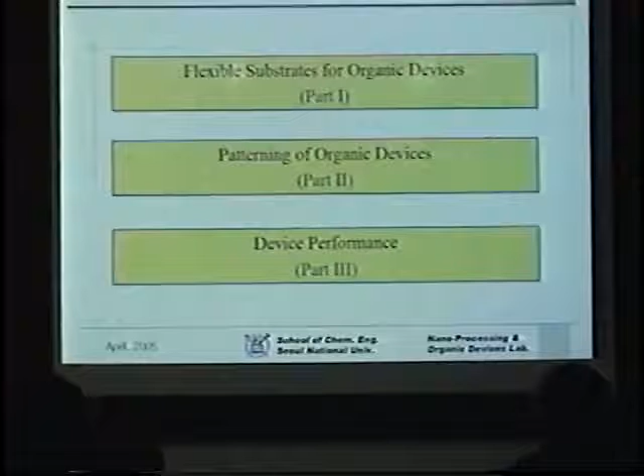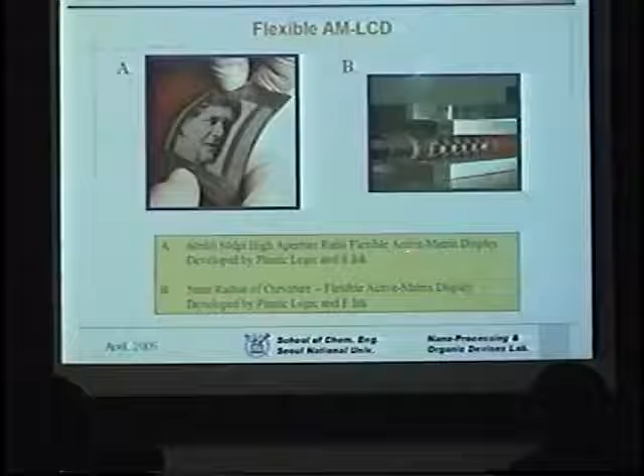When we talk about flexible display, of course we need flexible substrate. Shown here is the active matrix display made by plastic logic and e-ink. And of course, since it's flexible, you can bend it around.

The issues related to flexible substrates are really the requirements that the substrate has to meet, and these are listed here. But the most important thing, foremost, is really the ability of the substrate to resist any permeation or diffusion of water and oxygen.

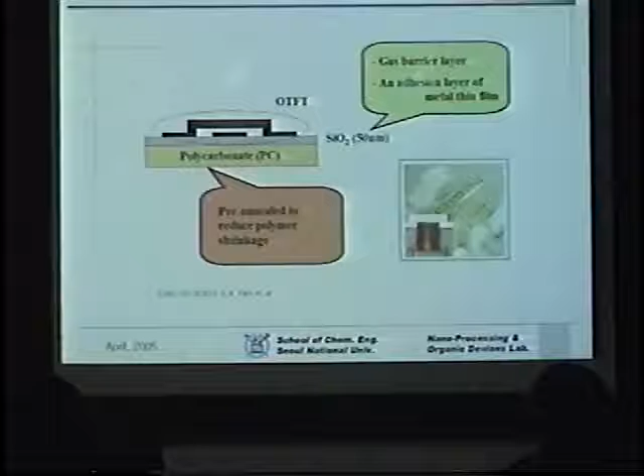The traditional approach for coping with this kind of problem was to use a multi-layer structure. Shown here is one example: we have a silicon dioxide layer on polycarbonate. This SiO2 layer is protecting the device from the air and moisture through this polycarbonate substrate.

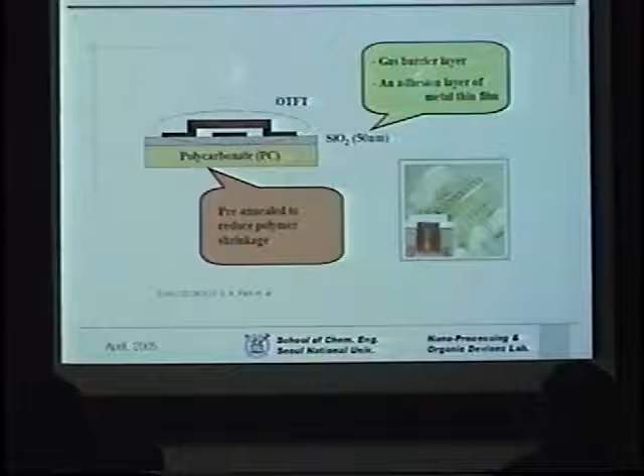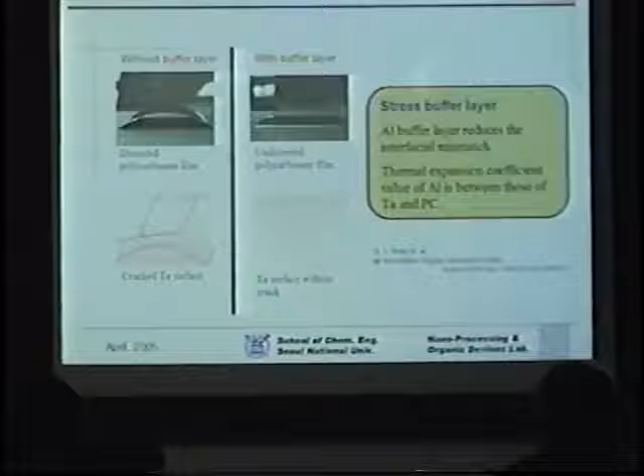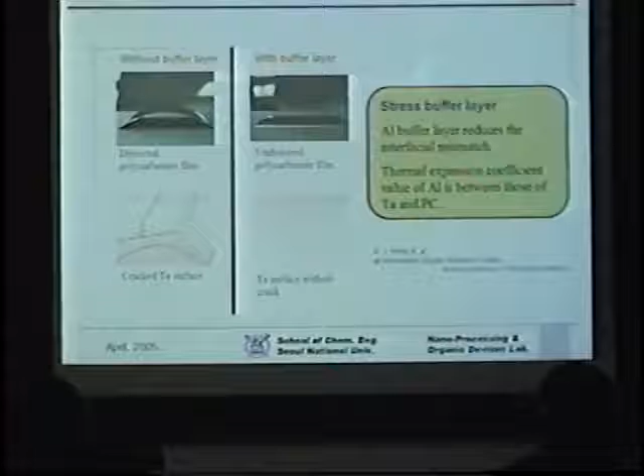Another example is given here. What we have is a metal, Ta, deposited on a substrate. As you can see, because of the difference in thermal expansion coefficients, it bends, and it can crack - the metal surface cracks. But if you introduce an intermediate layer between the Ta metal and the polycarbonate film, you can see that the substrate does not bend, and you don't see any cracks occurring. The reason is that you use an aluminum layer between the Ta and PC, so that you can ease up the effect of the difference in thermal expansion coefficients.

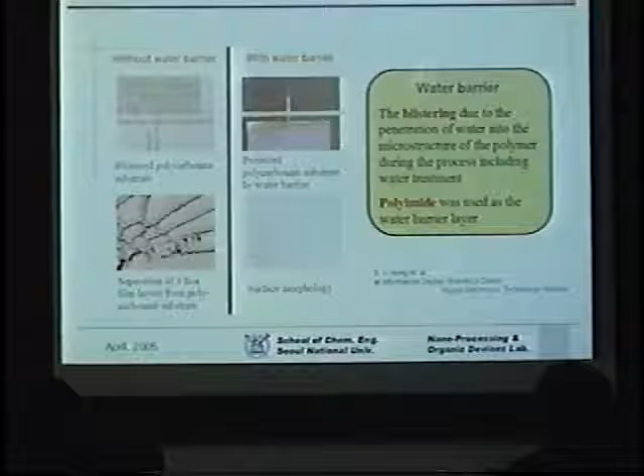Another example is given here. In this particular case, we have polyimide coated onto a polycarbonate substrate. The role of the polyimide layer is to act as a water barrier.

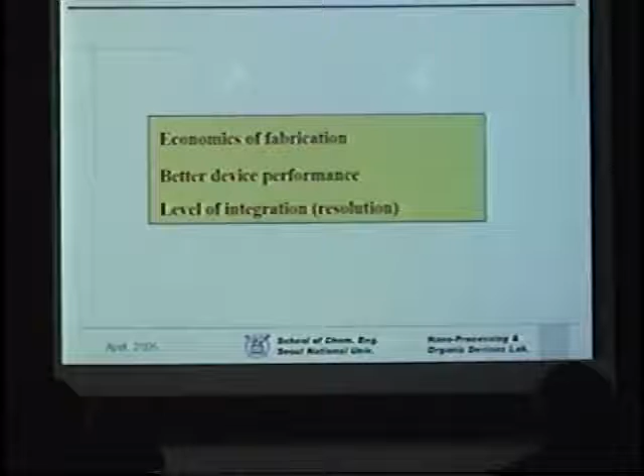This brings us to the next part on patterning for fabrication of organic devices. The issues here are, foremost, the economics of fabrication - whatever the process or patterning technique you use, it has to be economical, and in a blunt way, the one which will cost the least will win out. But in doing so, it has to maintain device performance as well, and there's an issue on resolution - how small a size you can go down to.

In this patterning, the traditional approach is typically to use a shadow mask, separated from the substrate by a certain distance, and through the opening you deposit the material of interest. Because of this gap, you can have shadow effects, making it very difficult to go below, say, 30 microns. Another approach is to use what is called a cathode separator, made through photolithographic means, and then you deposit the material in succession, for instance in OLED, to make the devices.

So there's a question when we talk about patterning: why can't we use the traditional or conventional patterning of photolithography? The reason is fairly simple - the solvents used in photolithography will degrade organic materials.

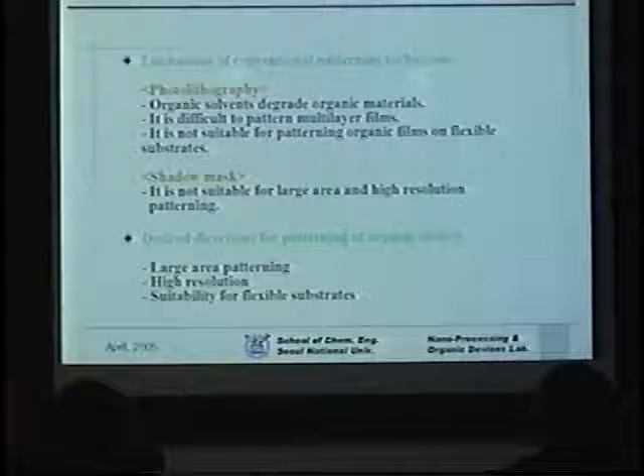And it's not suitable also for patterning organic films on flexible substrates because of the natural undulation inherently present in the substrate. And as indicated, when we shadow mask, it is not suitable for a large area, and it's not suitable for high resolution patterning.

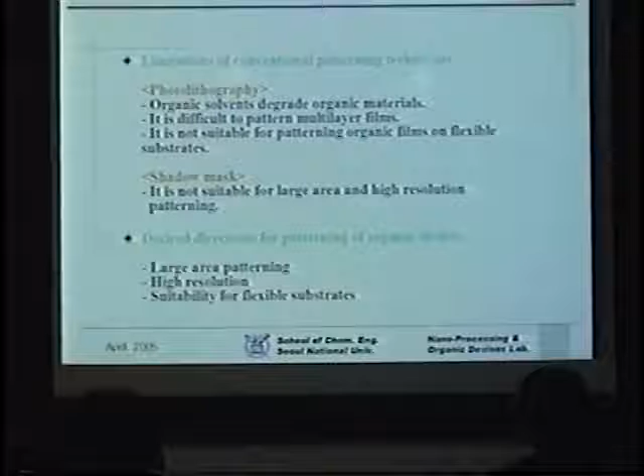Whatever patterning we do, the direction we have to follow is to make sure that we have large area patterning capability, also high resolution. It's got to be suitable for flexible substrates.

When we talk about organic electronics, we often talk about OLED, that is organic light emitting diode, organic thin film transistor, lasers, and sensors. As I indicated, large area applicability, the ability to go down to a small size, and foremost, of course, the cost effectiveness.

Just looking back to what people have done to cope with this problem, we can go to the Forrest Group at Princeton. He came up with what is called the cold welding method. In this particular case, you have a stamp and you deposit the metal layer onto it, and also on the substrate you have a metal layer deposited. You press it, then you heat it up and remove the mold. Upon removing, it takes the part in contact along with it, so you have the patterning done here.

You turn around in about 2 years and see how this can be utilized in some other way. In this particular case, it's a sort of detachment; in this case, it's an attachment process.

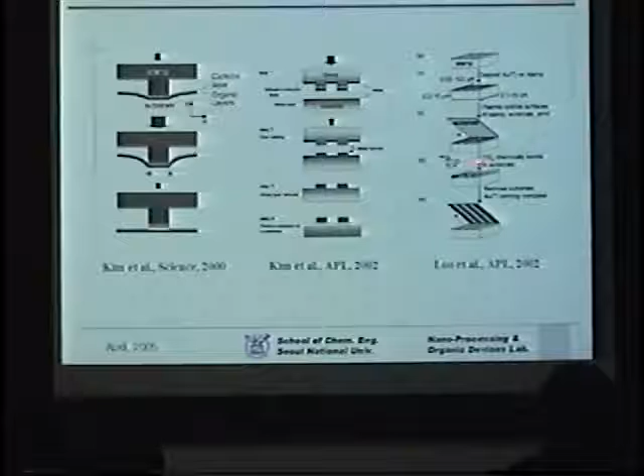And people at Bell Lab, Loo, who is now at I think the University of Texas in Austin, when she was there, the Bell Lab people came up with a similar method. In this particular case, you have a stamp and you deposit films that you want, but on top of any metal you have Ti for, say, adhesion later on. Then you make the substrate get in contact with the stamp. You heat it up some, and then because of chemical bonding taking place between Ti and the substrate, TiO2 to be more precise, you transfer the pattern from the mold to the substrate.

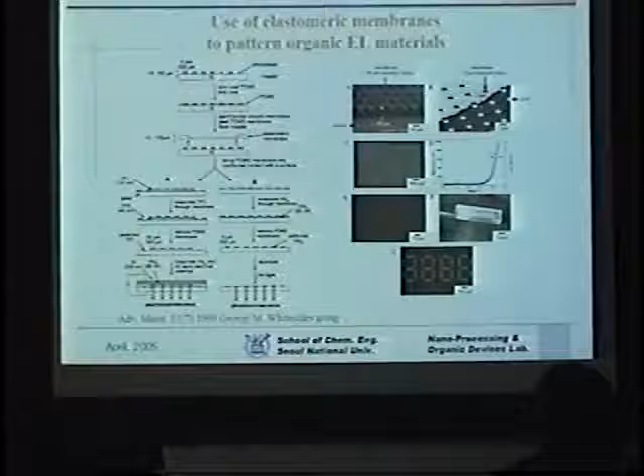Also, there were a number of efforts by Whitesides' group at Harvard. In this particular case, he used a PDMS mold, or polydimethyl siloxane mold, and this perforated membrane essentially acts as a shadow mask, but this time in contact mode, so you do the deposition and get what you want.

They in turn turn around to see how you can do RGB, and in this particular case you have the same perforated membrane as before, but use another PDMS mold with 9 openings. You place this one onto that one, and that gives you this kind of shape, with the holes lined up along the line.

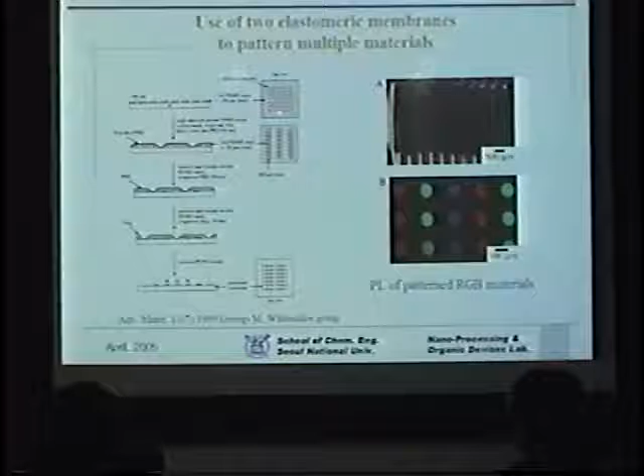In this particular case, you deposit R material, red material, then you move this one, shift it a little bit in this direction for the G deposition, and move it again for the blue deposition. That way you come up with this kind of RGB configuration.

The Whitesides group also utilized their MIMIC method to pattern, in this particular case, PANI, which is used as anode material. You have a PDMS mold placed on a substrate, place a drop of PANI, and the capillarity sucks this material into the channel, lifts it up, and you can define this kind of anode material.

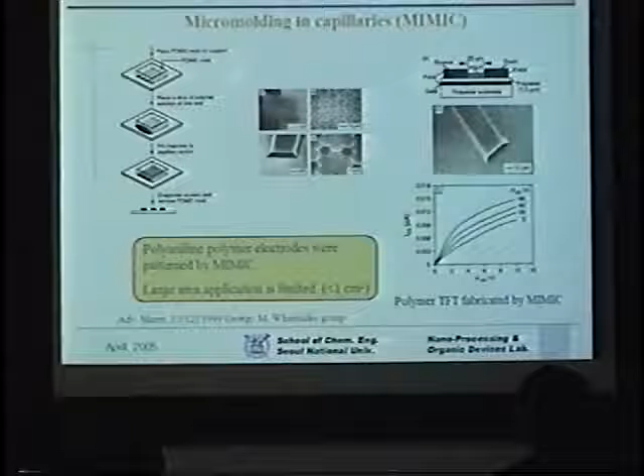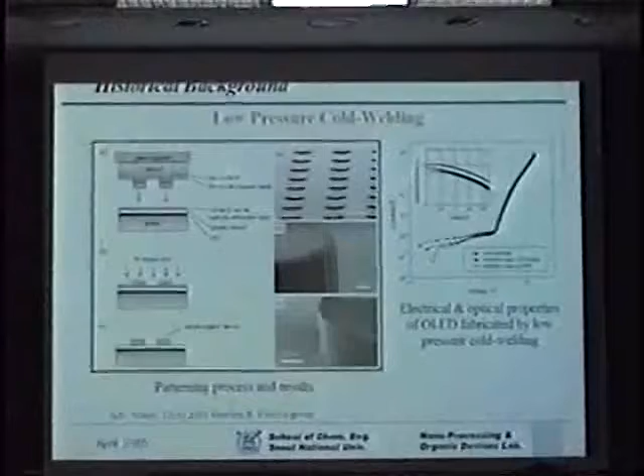The Forrest group also utilized their cold welding method in forming cathode this time around, and showed that when you utilize this method, there's no difference between the transfer method and the conventional method as far as device performance.

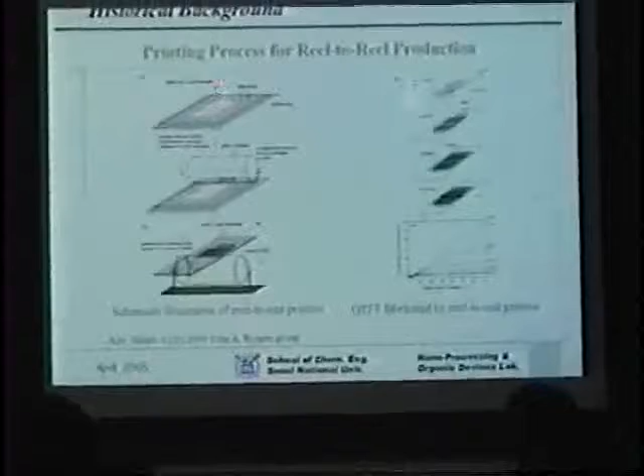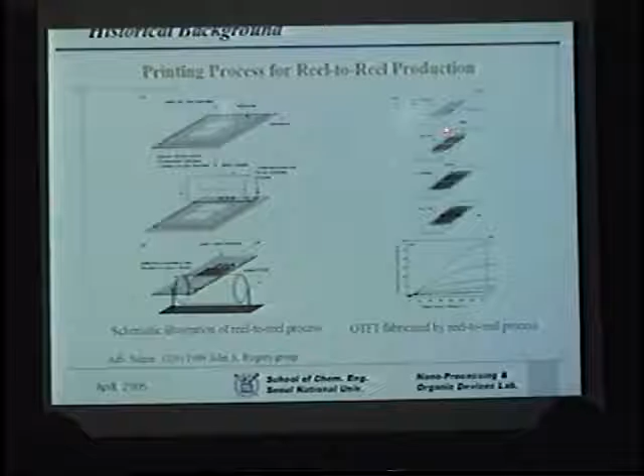And Rogers Group - this work was done not at the University of Illinois, but before he joined the university, when he was at Bell Lab. In this case, you have a mold, then you place drops of PDMS to form a pattern mold, roll it and bind it around a cylinder, then roll the cylinder so that the SAM material can be stamped onto the substrate. Then you carry out etching for electrode definition, and subsequent deposition for OTFT fabrication. This is called reel-to-reel, sometimes roll-to-roll production.

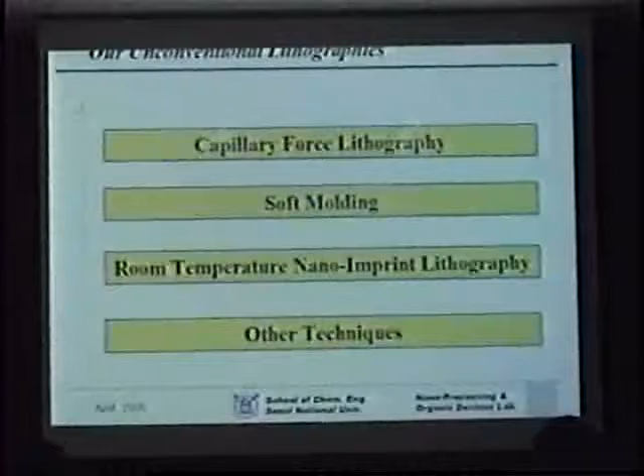So let me get on to what we do in this area. Before I do that, I'd like to introduce some unconventional lithographies that we have, named capillary force lithography, soft molding, room temperature nano-imprint lithography, and other techniques.

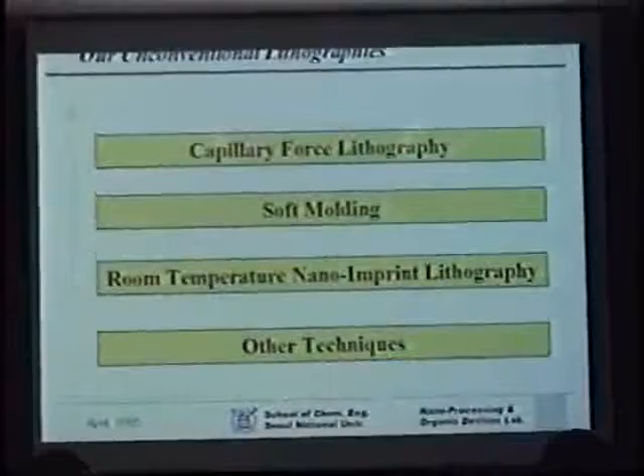Capillary force lithography, as the name implies, utilizes capillary force. It's a fairly simple method to pattern anything. You have a patterned PDMS mold, as I talked about before, and place that onto a polymer layer spin-coated onto a substrate such as a wafer.

Then simply raise the temperature above the glass transition temperature of the polymer, which typically is around 100 to 110 degrees. When the temperature is above Tg, the polymer becomes fluidic, and because of the capillary force present in the void, the fluid material fills up the void. You cool it down to room temperature, remove the mold, and there you have the pattern formed.

In this case, there are two different situations. Either you have a residual layer when you have a thick film to start with, or if you have a thin film to start with, then the substrate surface is exposed.

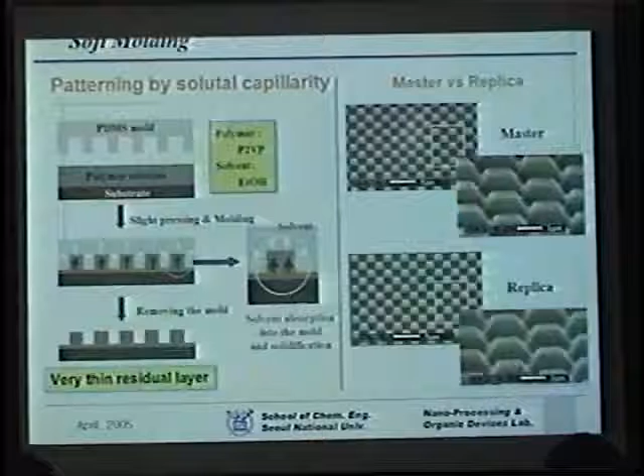In a similar way, in soft molding, we use capillarity, except that the capillarity is induced by the fluidity afforded by the presence of solvent. You have a substrate, say a wafer, and you use any polymer, spin coat it, and in the wet state you place the mold down. The solvent vapor diffuses out, and after a while you get this kind of pattern formed.

So this one here is fairly simple. You just spin coat, and then in a wet state you place the stamp down, and after a while you get the pattern formed. The examples of the comparison between the original master pattern and the pattern formed by soft molding show they are almost the same.

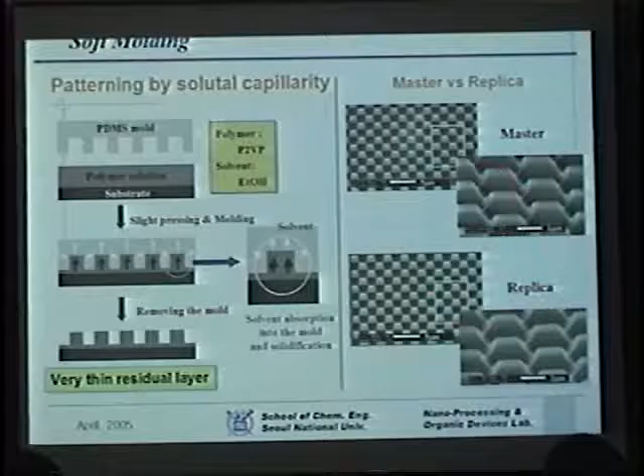We also have room temperature nanoimprint lithography. In this particular case, the principle is rather simple: you have a polymer layer, you place the hard mold down, and by brute force you press it down and remove it. Nanoimprint lithography was originally developed by Steve Chou at Princeton, and he uses very high temperature, but in this case we utilize plastic deformation of the polymer, so you can carry it out at room temperature.

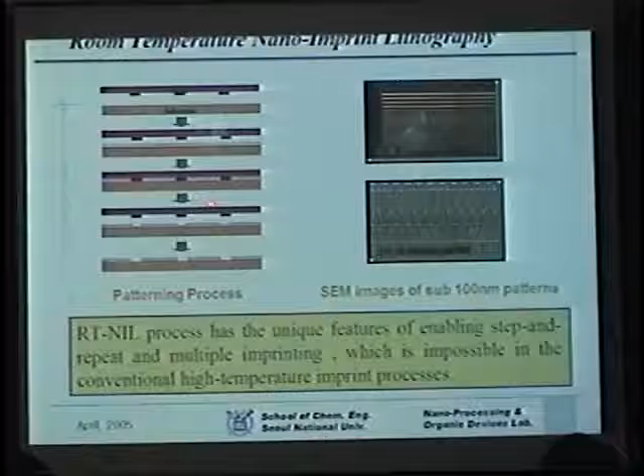It gives some unique capabilities that the hot process wouldn't. Shown here are some examples of patterns, including some patterns in the sub-100 nanometer range.

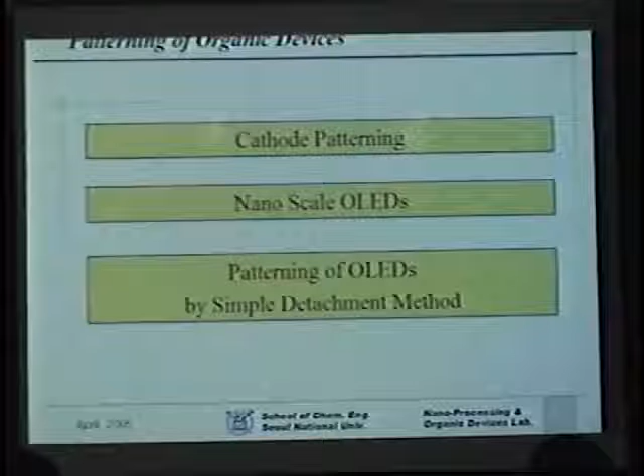With this introduction, let me go right into cathode patterning, nanoscale OLEDs, and patterning OLEDs, also by a simple detachment method.

One of the methods we utilize is to do metal transfer. In this case, you have a glass mold, and you put on a SAM, or self-assembled monolayer, to help release of the aluminum later on. You just put it down onto the organic layer, press it, and release it, and you get the metal lines formed. It's a simple transfer technique.

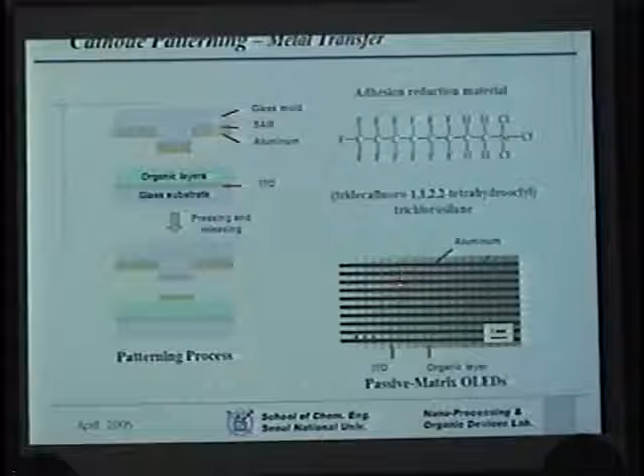Shown here is a simple passive matrix OLED, and these black lines are the aluminum lines formed. The faint pattern in the background is the ITO electrodes, so you can have this passive matrix through metal transfer.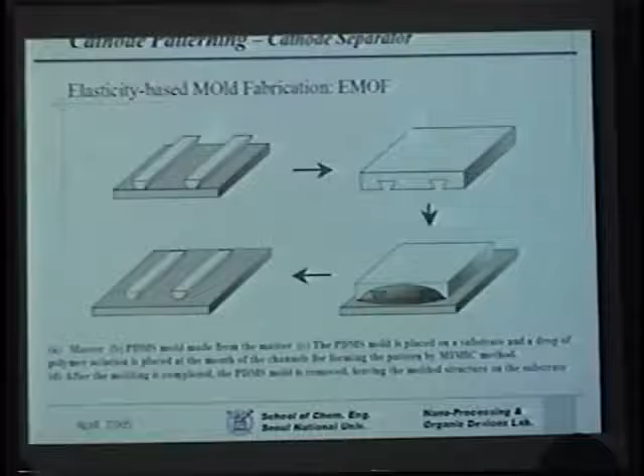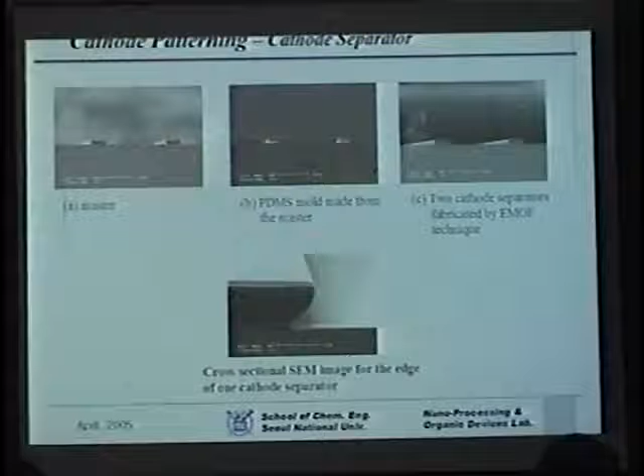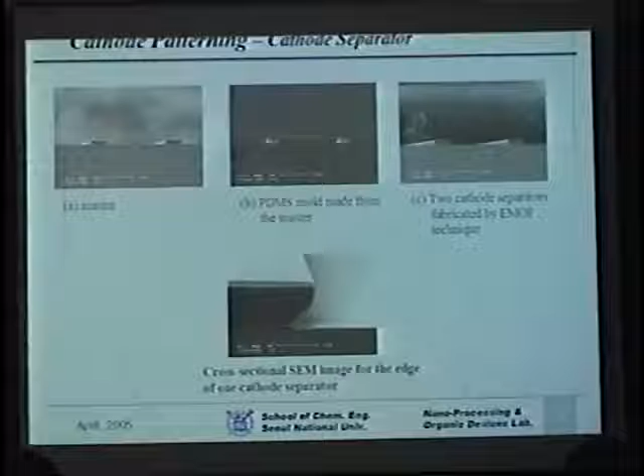Here's a typical example of the actual results. This is the master. This is the mold made from this master. The cathode separator made with the use of this master. Upon magnifying the edge of this cathode separator, you can see there's enough clearance between this edge and that to give good separation between adjacent devices.

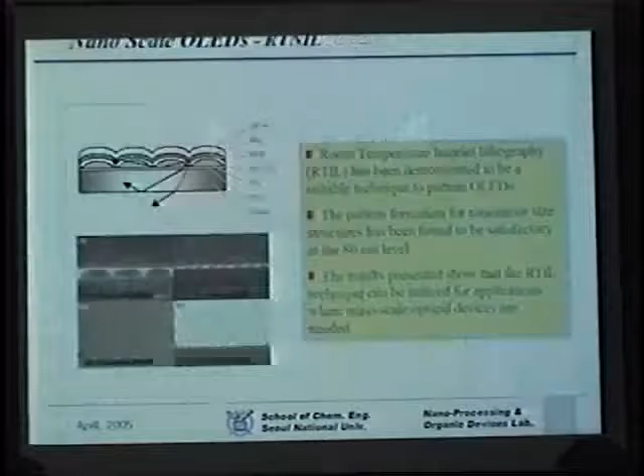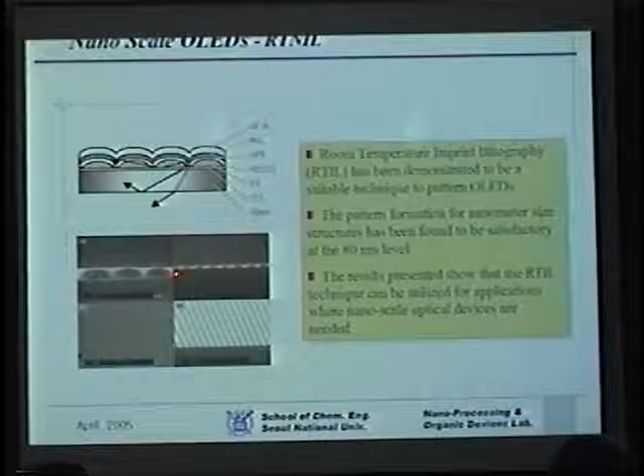Another question we had along the way was to see whether a small device would function just like a big device. In this case, we made it by patterning this polystyrene layer, acting as a barrier, forming an 80 nanometer device in this gap. We found that this 80 nanometer scale device would function exactly like a big device, but we found some shift in the EL spectrum, probably due to scattering taking place along the zigzag type patterning done.

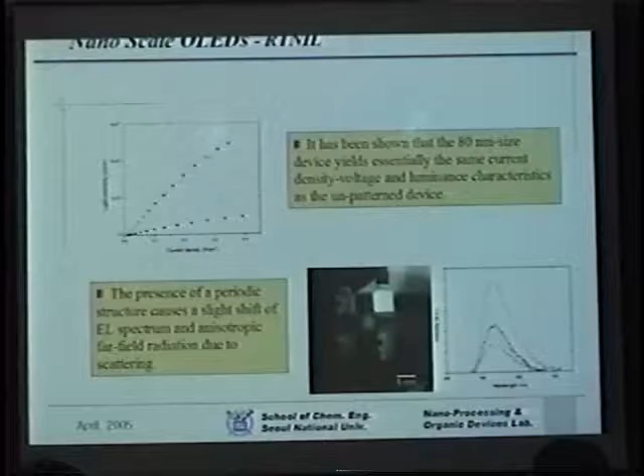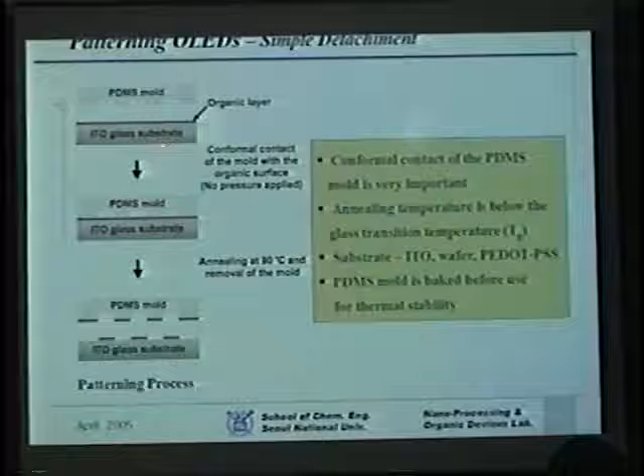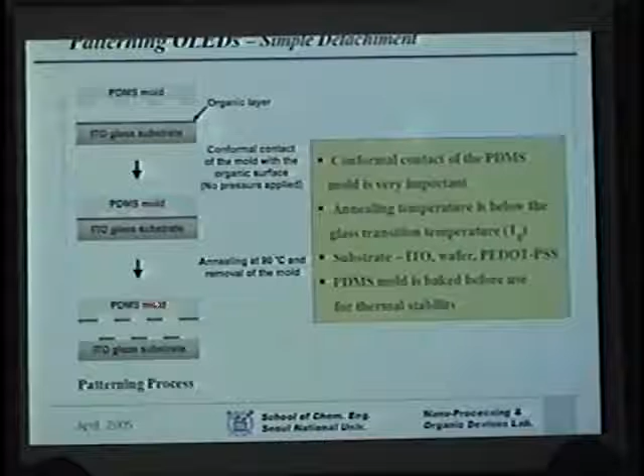Now shown here is another unconventional method we developed. We call it simple detachment because it's fairly simple. You have a glass substrate for OLED fabrication, and you put on the organic layers that you want. You place the stamp down, raise the temperature to below the glass transition temperature, in this case typically below 90 degrees. We don't apply any pressure at all, just simply remove the mold, and the part that was in contact with the protruding part of the mold gets lifted. So, simple detachment.

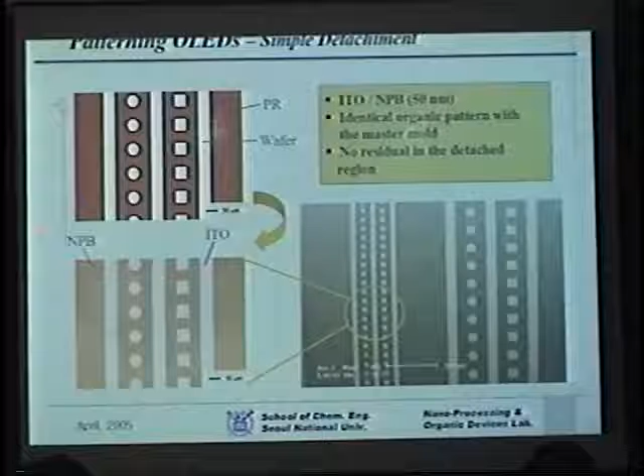To show that it is effective, we did some actual patterning. We had an NPB layer on ITO coated glass, NPB being the hole transport layer, and we could see that the patterning can be done fairly well. We also wanted to show the method is equally effective with a series of lines of different sizes, in this case from 1 micron to 70 micron. We also wanted to see the edge fidelity, and you can see the fidelity is not that bad.

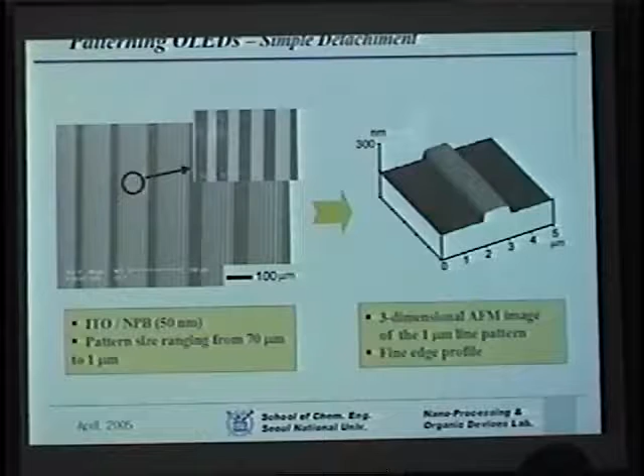Another example of the patterning done through the simple detachment method - shown here is 1 micron lines. Of course, these kinds of lines cannot be defined by the shadow mask technique.

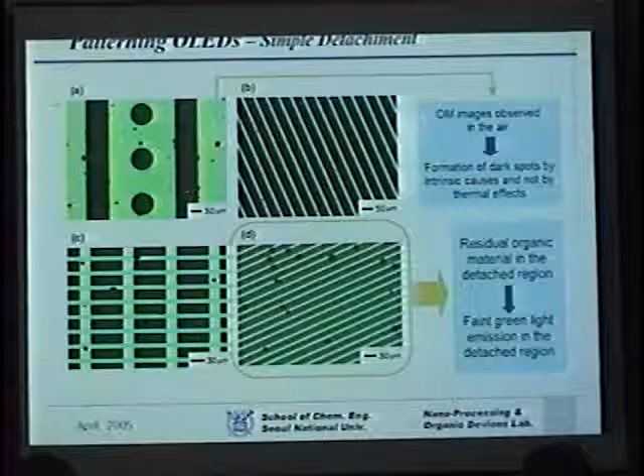So we also wanted to show that it works with the device as well - that when we apply this technique to fabricate the device, the results would work properly. In this part, the NPB is present, but in this case we use Alq3 as the active layer, and Alq3 is missing here, so no emission. You can see green emission, also a line pattern, light emitting through line patterns. This here is the sort of grid structure.

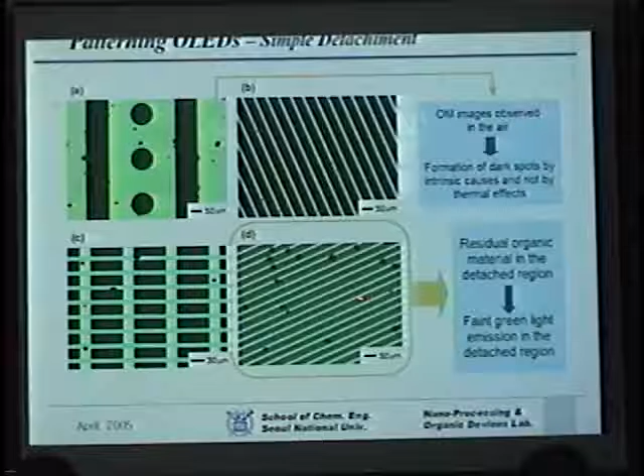But if you do not do a good job of detachment, there's some residual layer remaining, and so you have a smearing effect.

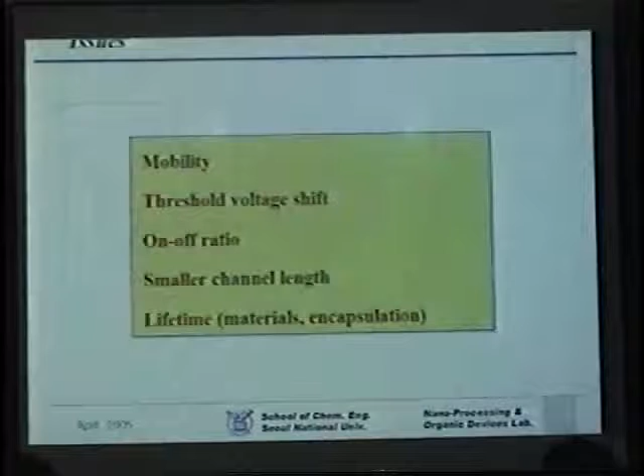Which brings me to the last subject, which is device performance. The issues here are always mobility, because in organic devices the mobility is very low compared to silicon devices. When you use organic substance, there's always a shift in threshold voltage, so there's a need to control this. Another concern has to do with the on-off ratio, which tends to be very low compared to silicon devices. There's also an issue about channel length, which determines the device characteristics as well as the number of devices you can fit into a given area. And of course there's always the organic material lifetime issues, related to materials and encapsulation.

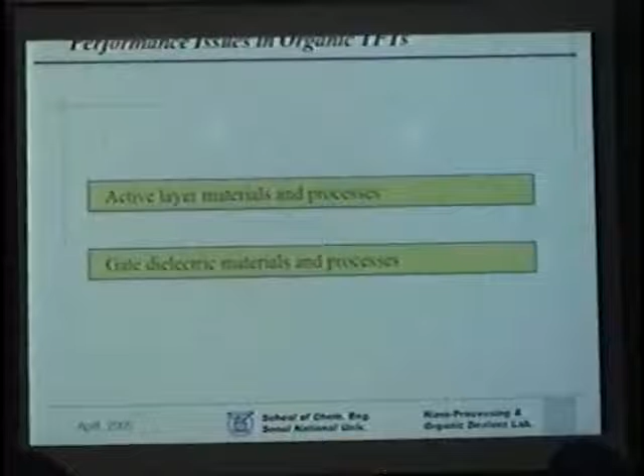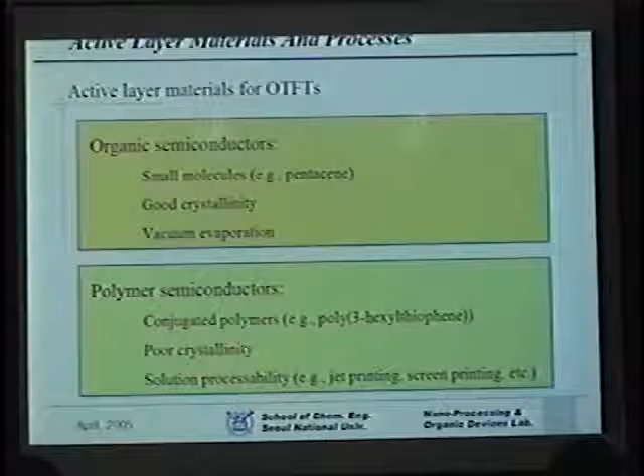Let me go into a brief review of active materials and gate dielectric materials. As far as active material, organic semiconductors, typically small molecules are used. The preferred substance these days is pentacene. It gives good crystallinity, and formation is done through vacuum deposition. Polymer semiconductors, conjugated polymers, are also used. Because of the nature of polymers, crystallinity is not that great, but it does give the advantage of being able to do solution processing, which is cheap.

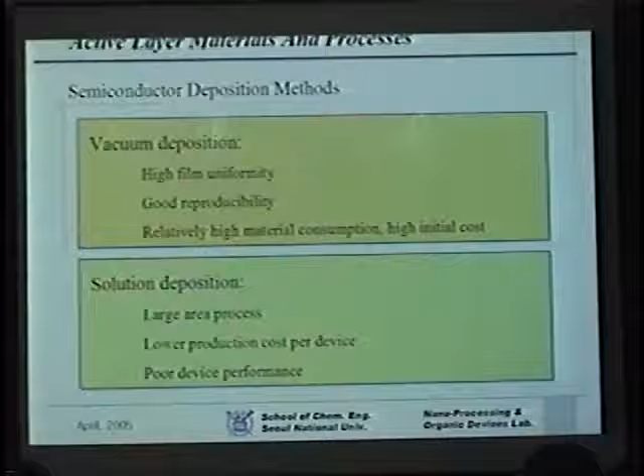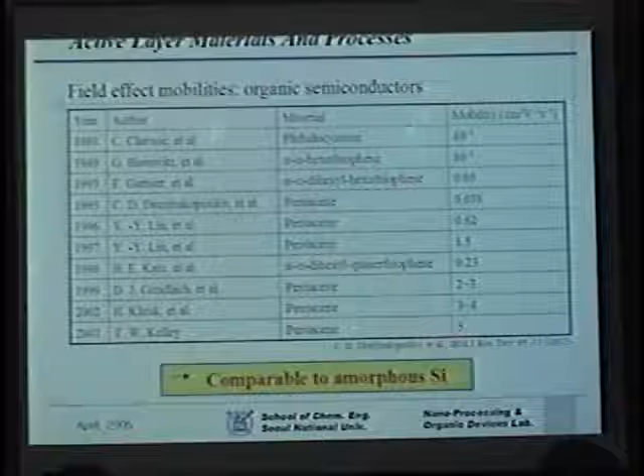Let me move on to the next topic - field effect mobilities of organic semiconductors. It turns out that when they tried in 1988, the mobility was 10 to the minus 3 square centimeters per volt per second. In about 15 years, there was about a 4 order of magnitude improvement in mobility. These days, pentacene gives about 5. But if you are careful and willing to spend time, the mobility can go up to tens of square centimeters per volt per second.

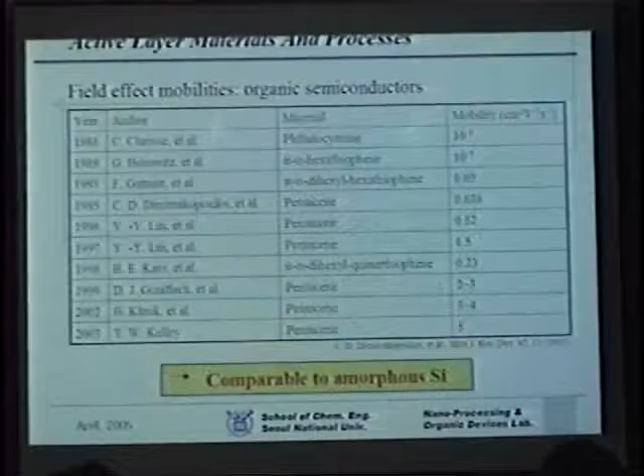So the key to what - can we go back? Key to what is shown here is that in terms of mobility, organic transistor is comparable to amorphous silicon, and probably this is the key.

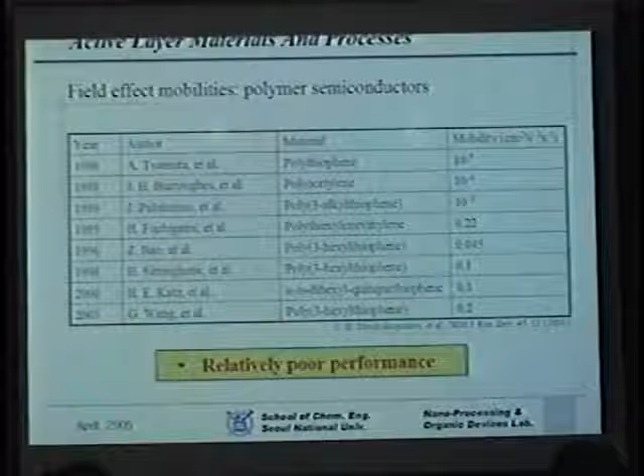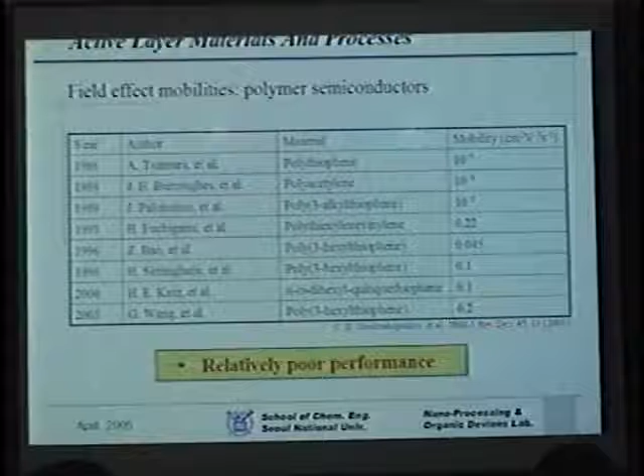But when it comes to polymer semiconductors, as opposed to monomolecular organic materials, the performance gets fairly bad, around 10 to the minus 5. Although there has been an improvement of about 4 orders of magnitude, it's still about an order of magnitude smaller than organic materials like pentacene.

So for organic semiconductors, the issue for better mobility really is the molecular structure. That is, the molecules are relatively well ordered. You go from low mobility to bigger mobility.

And the same is true with pentacene. As I indicated before, pentacene gives you a crystalline structure. Shown here is the grain of the pentacene molecule, and as you increase the temperature, for instance from room temperature to about 100 degrees, you see a vast improvement in grain size, which in turn means higher mobility.

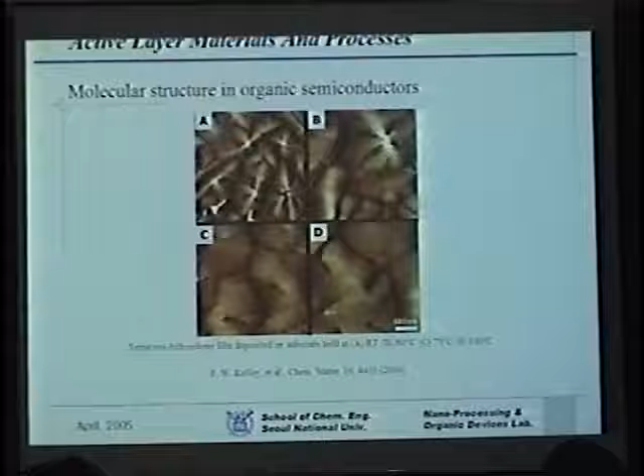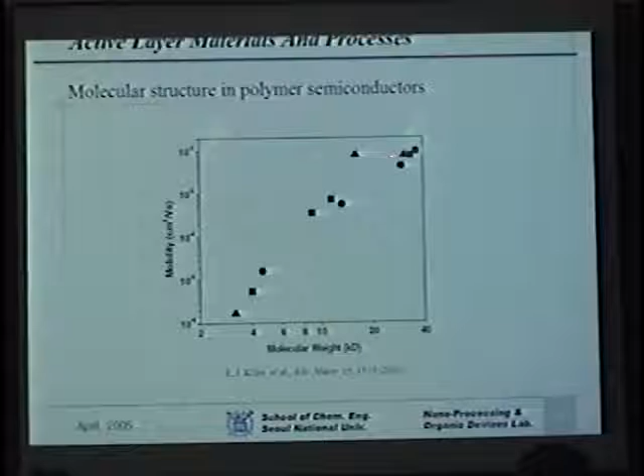With the polymer semiconductor, the highest mobility is in the range of about, as indicated before, 0.2.

So let's move on to gate dielectric materials. In the same way as the silicon people do, inorganic insulators have been used, but of course if you have a flexible display you just can't use this kind of thing, although there's an effort by John Rogers' group to utilize this even for flexible substrates. Organic insulators, typically polymers, give you flexibility, but the weak point is that they can be degraded by solvents.

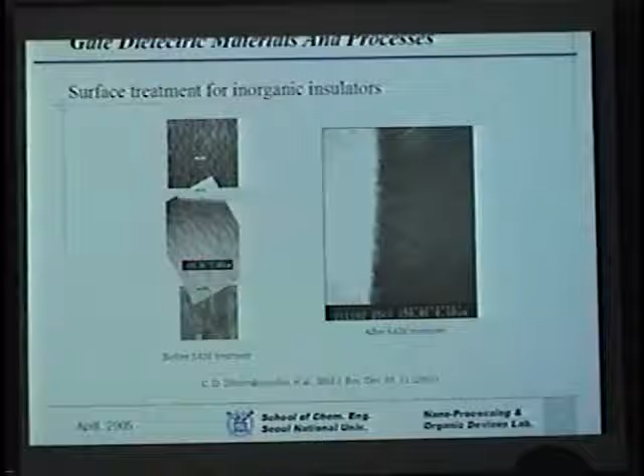One example here shows how the grain size of pentacene deposited on SiO2 can be changed. By treating the surface with a self-assembled material, the grain size in the electrode and in the insulator become the same, whereas when not treated, they are different.

In the case of polymer used as gate insulator, as I indicated before, mobility is still in the range between 10 to the minus 1 and 10 to the minus 2.

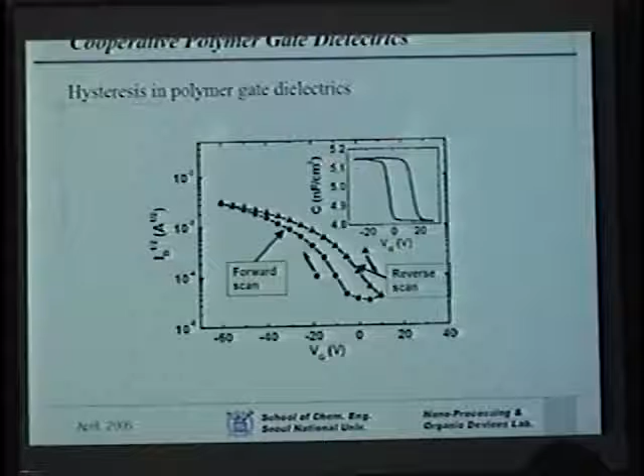The same is shown here for capacitance versus voltage. In the literature, there are a lot of reasons given for this hysteresis behavior, that is, what the origin of it is. But the fact of the matter is that whenever the dielectric material thickness increases, the hysteresis also increases, which indicates that this has to do with bulk characteristics rather than typical interface or surface characteristics.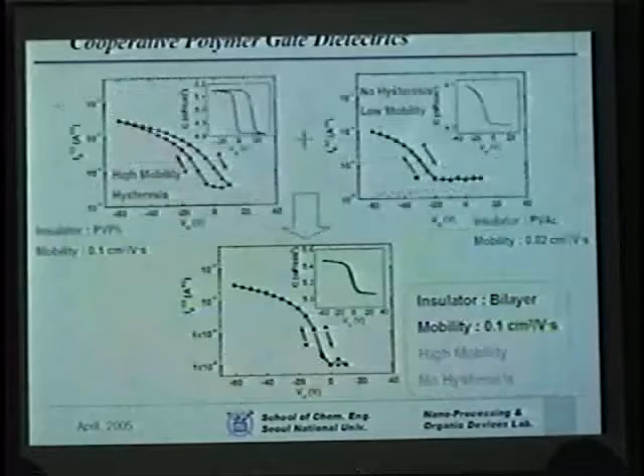So what we did, as shown in the previous slide, was use a bilayer, a very thin polyvinyl phenol layer and a very thick polyvinyl acetate film, to eliminate the hysteresis problem. When we use PVPH as the gate dielectric, you get high mobility, about 0.1, but you do have this undesired hysteresis problem.

Whereas with the other material you do not have any hysteresis at all, but the mobility is fairly low, a typical value. But when you have the bilayer I talked about, you can combine high mobility with no hysteresis, meaning no threshold voltage shift, and still have satisfactory mobility.

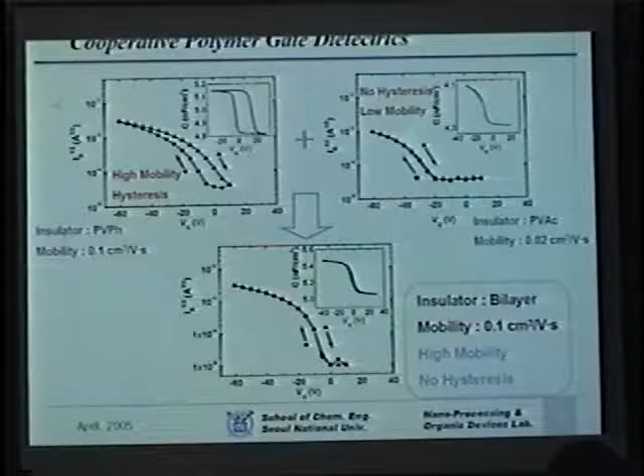The reason has a lot to do with the grain size on a given insulator. On the PVAc, the pentacene grain size is fairly small, as you can see here. On the PVPH, grain size is larger, and in the bilayer, the grain size is the same throughout.

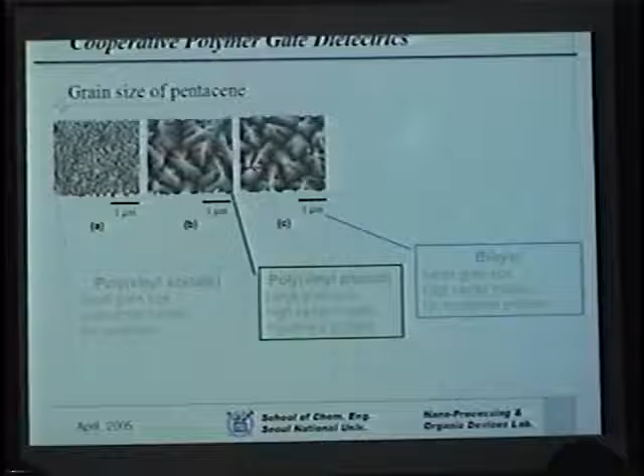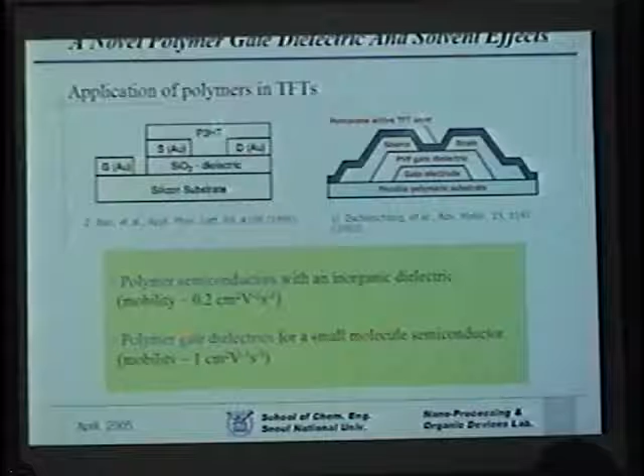In another effort, we tried to come up with, I shouldn't say new, but let me just say, new gate dielectric material. It's known in the literature that with inorganic dielectrics such as silicon dioxide, using polymer semiconductor instead of pentacene, mobility is around 0.2. If you use pentacene with a polymer gate dielectric, the mobility is on the order of 1.

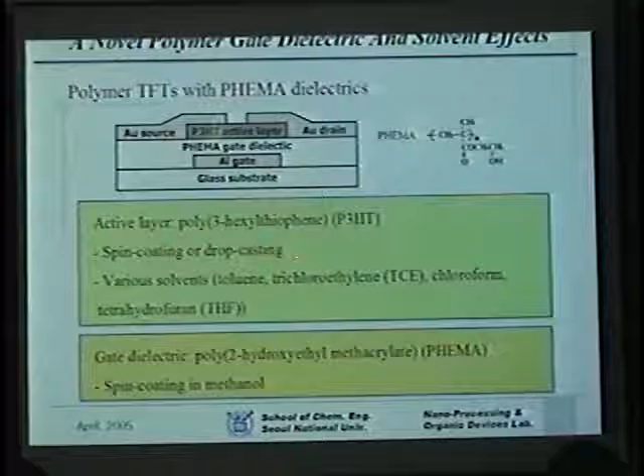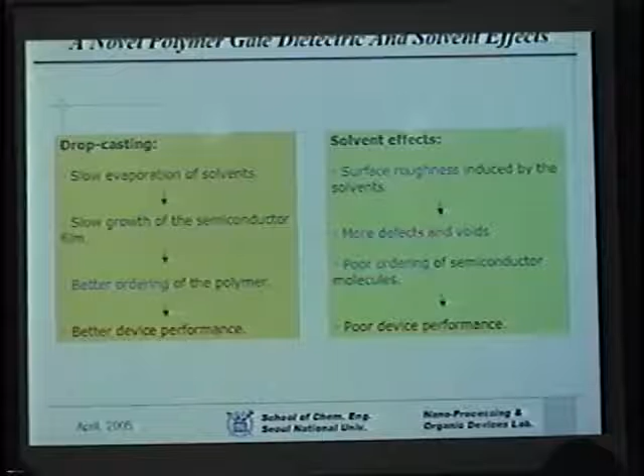Comparing drop casting and spin coating: with drop casting, evaporation takes place fairly slowly, which gives relatively enough time for slow growth of the polymer film, resulting in better ordering of the polymer and in turn better device performance. As I'll go into in some detail, surface roughness is a key factor, and it is indeed induced by solvents. Although you use compatible solvents, poor ordering and solvent effects lead to poor device performance.

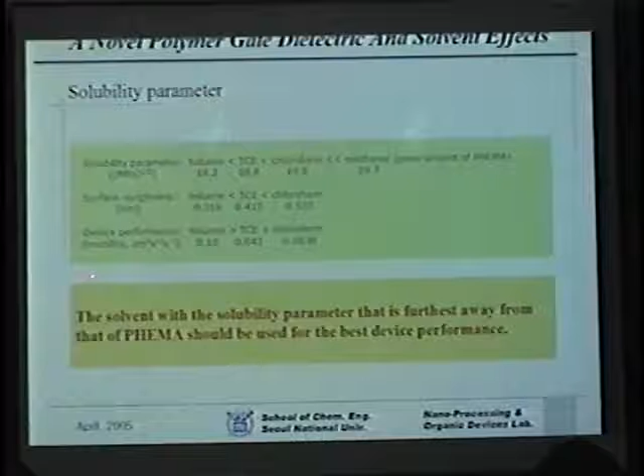So the parameter that can characterize this solubility is, of course, the solubility parameter. In short, one has to use a solvent with the solubility parameter that is furthest away from the dielectric material you're trying to form, for best device performance.

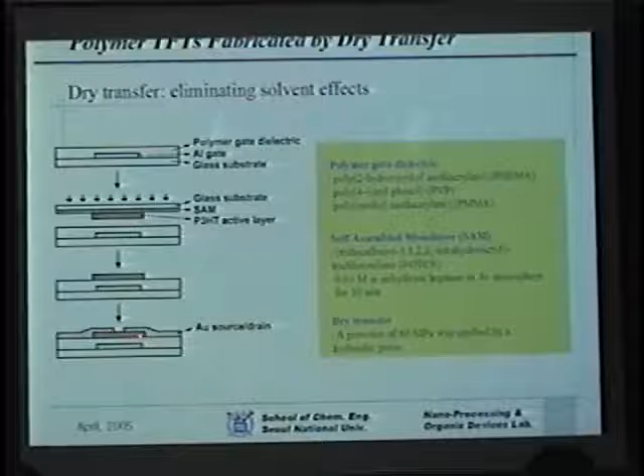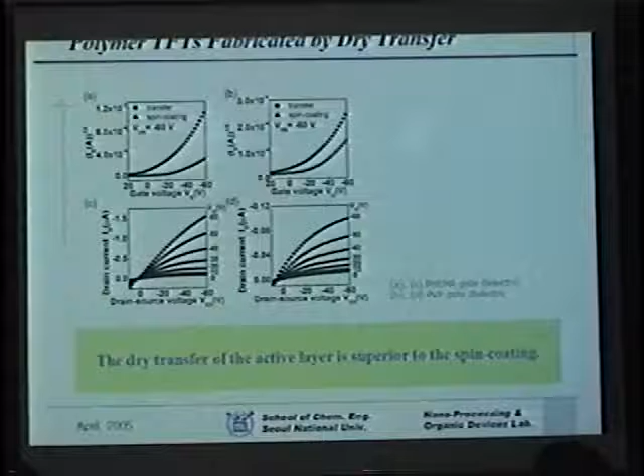And the last one, I'll just move on - this utilizes dry transfer. In this case, you transfer the active polymer semiconductor layer onto the underlying dielectric. As a result, by doing the dry transfer, you eliminate the bad effect of solvents. You can also, if you want, before transfer, make the surface hydrophobic.

And also, if you like, you can do annealing as well. As you can see, when you use PHEMA as gate dielectric compared with the dry transfer method versus the solution technique, you see a huge difference in device performance. The same is true with the PVP gate dielectric.

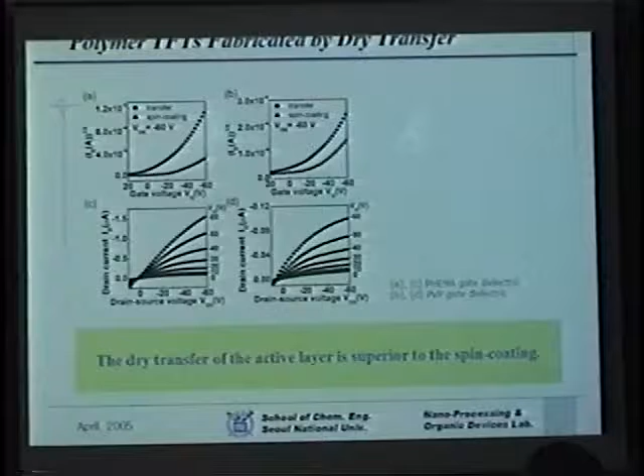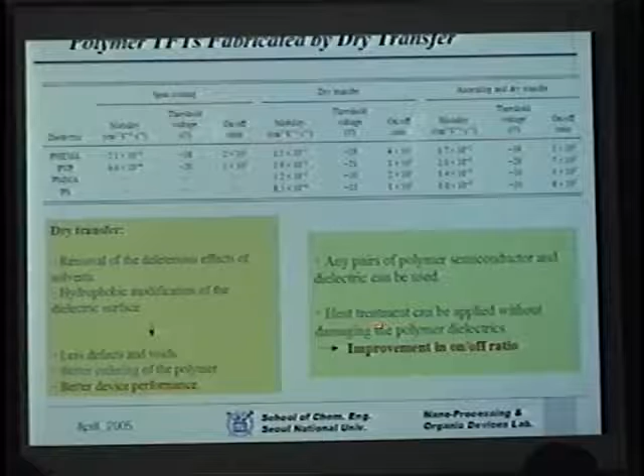As I indicated, with the dry transfer method, you can do heat treatment, which results in improved on-off ratio. When you do the spin coating, the on-off ratio is about 100, about 1,000. So you get some improvement in on-off ratio by heat treatment prior to the transfer. Because you do not use solvents, you do not generate defects and voids. You allow better ordering if given sufficient time, which in turn leads to better device performance.

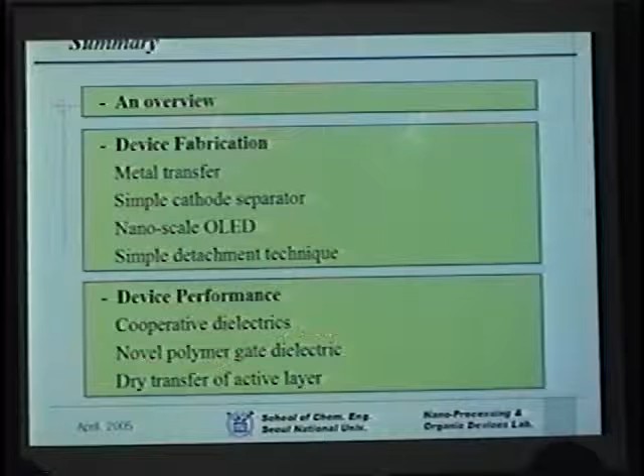So let me summarize my talk. I gave an overview and then moved on to device fabrication, to talk about metal transfer, simple cathode separator, nanoscale OLED, and simple detachment technique. I also talked about device performance as affected by cooperative dielectrics, a new polymer gate dielectric, and the method of dry transfer of the active layer.

So just wrapping up, what does it mean to us? What does the future hold? I ask myself, and I can foresee, and in a sense predict, that we'll have commercial flat panel organic displays - not with organic TFTs, but silicon TFTs - in about 2 or 3 years. It's just like what TFT LCD was in 1992. If you recall, the TFT LCD business took off in 3 years, around 1995 and 1996. I believe the same will happen.

After that, or concurrent with that, we'll have flexible or organic display. And finally, we'll have all-organic flat panel display. Thank you for listening.